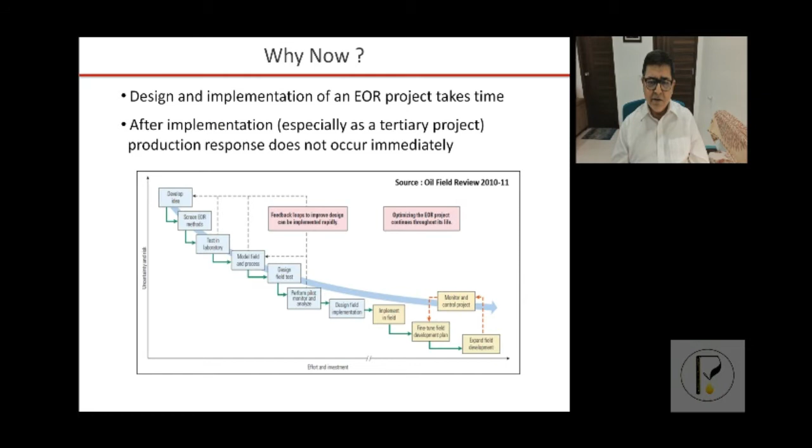Then there's a third bag of recovery processes called tertiary recovery processes, which are mostly EOR processes: thermal, gas injection, and chemical. But these days, even in the past, some of the processes have come out of the tertiary recovery bag and have been employed right in the primary stage or in the secondary stage, like steam and polymers. They are widely being used in the primary, late primary, or the beginning of the secondary recovery processes. So EOR no longer targets only immobile oil. It also targets mobile oil as well.

When to think of EOR? The time is now. Sir Winston Churchill once said, the best time to plant a tree is 20 years ago. The second best time is now. In the E&P industry, the best time to plan and begin implementation of EOR processes is during the initial development planning, when a field is discovered. And if you have not thought of it at that stage, the second best time is now.

Why now? Design and implementation of an EOR project takes time. Right from conceiving an idea, transferring it to the desktop, translating it into a one-dimensional laboratory viability project, then to a three-dimensional field pilot project, implementation, evaluation, and then drawing up plans for field-wide expansion. Its engineering design, construction, erection, commissioning takes time, 5 to 10 years.

So you can see it takes time to make the efforts and the investments to reduce the uncertainty and the risk, right from developing the idea in our mind to yielding commercial oil in the field. So that's the message. Think of EOR right at the beginning and start planning for the right EOR project, or maybe more than one EOR project. It depends on the resources available to the thinker.

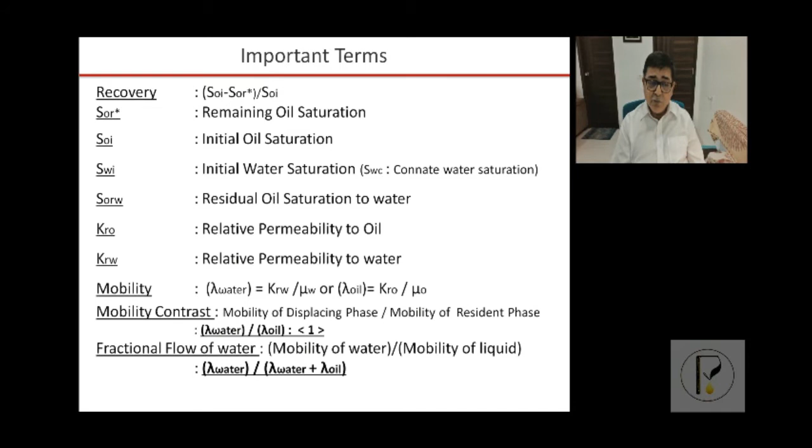So how we are concerned with these terms, we will see there. Mobility is the most important term for a reservoir engineer: the mobility of the water and the mobility of the oil. There are different types of oils, from extra heavy oil, medium gravity, light, to volatile oil, and mobilities are different for these different types of oils.

Water is more or less constant, negligibly varying with pressure and temperature. But oil properties are totally different in different types of oils, and mobilities are the major concern. Mobility is defined as the ratio of relative permeability to that phase to the viscosity of that phase. The mobility contrast, which controls the displacement in the pores, is the ratio of mobility of the displacing phase to the mobility of the resident phase. So that's mobility of water to the mobility of oil.

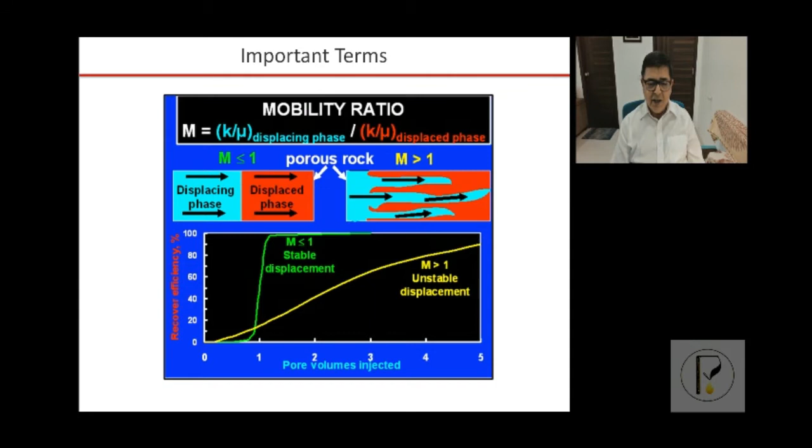Now this can be equal to 1, less than 1, or greater than 1. When it is equal to or less than 1, it is favorable displacement, a piston-like displacement, where nature cannot give a better situation than that. But as the mobility contrast goes on increasing beyond 1, the displacement becomes unstable. As a result, fingers of water start developing, which break through into the producers, leaving behind significant bypassed oil saturation and early water breakthrough, so operators produce more water and less oil with time, resulting in lower recoveries.

Now, what is fractional flow of water? Fractional flow of water is the mobility of water to the mobility of the liquid. So lambda water by lambda water plus lambda oil. In the subsequent slides, we will see more of this mobility contrast.

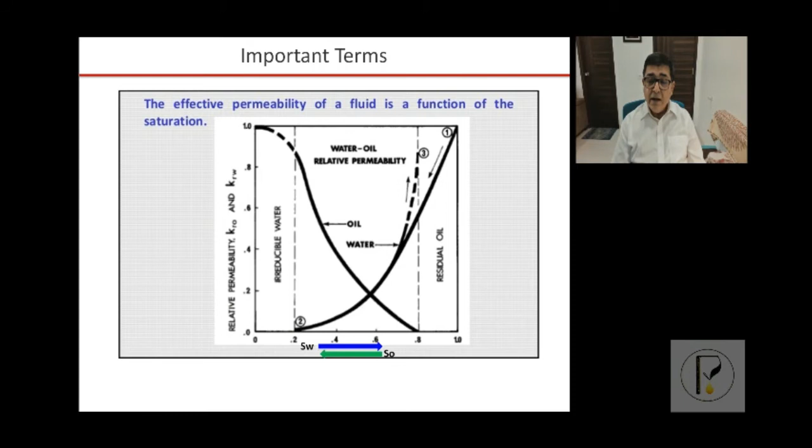This picture depicts the mobility ratio, favorable and unfavorable, stable and unstable. When it is close to 1 or less than 1, the displacement of oil by water is very stable. You can see from the curve, with 1 pore volume of water invading the pores, recovery efficiency is very high. Whereas as the mobility contrast goes on increasing more than 1, the displacement becomes very unstable. You can see the fingers in the top right hand corner of water encroaching through the reservoir and breaking through into the producers for early water production.

So you can see more pore volumes of water injected, invading the pores, and more time required to achieve the same recovery. But can we wait for such time? Can we afford to produce so much water? It costs. So EOR processes walk in at this stage to somehow make the entire process stable.

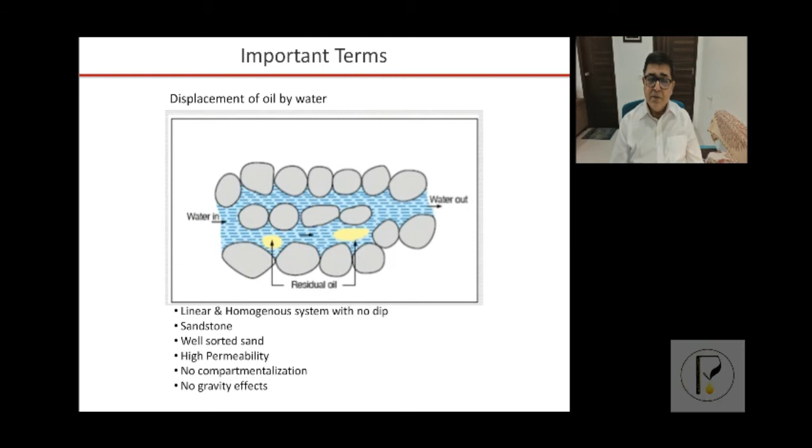Relative permeability, a very important term which we will be encountering in the fractional flow, is a dimensionless number. You can see on the y-axis relative permeability to oil and water, and the endpoints. SW is the blue, increasing saturation of water, and on the reverse is increasing oil saturation. At the endpoint KRO, we have initial water saturation of 20% and oil saturation of 80%. This is two-phase occupying the pores. At the other endpoint we have water saturation of 80% and SOR of around 20%. So these are the endpoints.

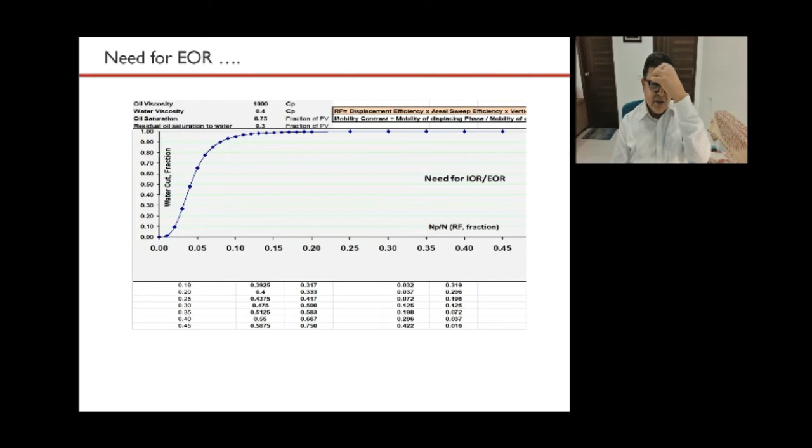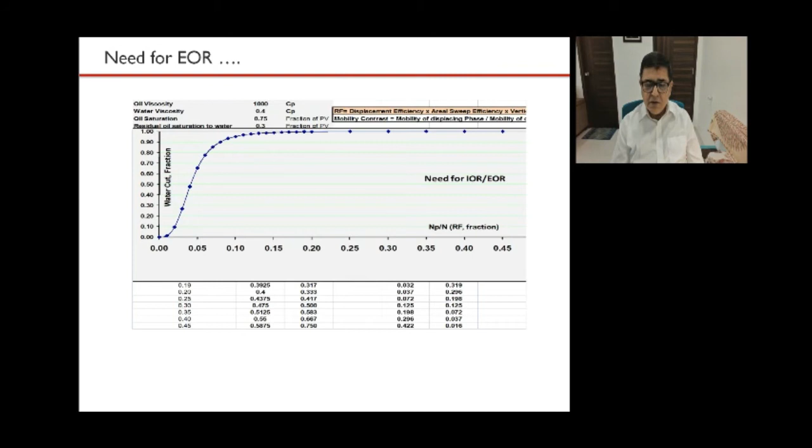You can see the intersection of KRW and KRO beyond 50%, which indicates that it's a water wet system. And you can note the endpoints, between these two numbers, SWI and SOR. This is the water saturation that goes into the computation of normalized water saturation.

So this is a linear displacement of oil by water, water in, water out in the pores, leaving behind the residual oil within the pores, which is held by the interfacial forces as well as the capillary forces. How much of water is flowing out of how much of the liquid coming out, that's the basic fractional flow.

What we are going to see in the subsequent computation of fractional flow is for a linear homogeneous system with no dip, no gravity effects, sandstone reservoirs, very well sorted sands, tortuosity 1, high permeability, and no compartmentalization. This should be the launching pad for you to start developing on a radial system and subsequently on a multi-layered system of fractional flow.

So now, before we move on to the actual fractional flow, this is the need for EOR. You can see the fractional flow curve, water cut with recovery. Well, the x-axis can be represented by water saturation as well, but for easier understanding, I have represented it with recovery for you to appreciate better. And we can see at 90% water cut, we have around 6 to 7% recovery for that particular type of oil which is being considered.

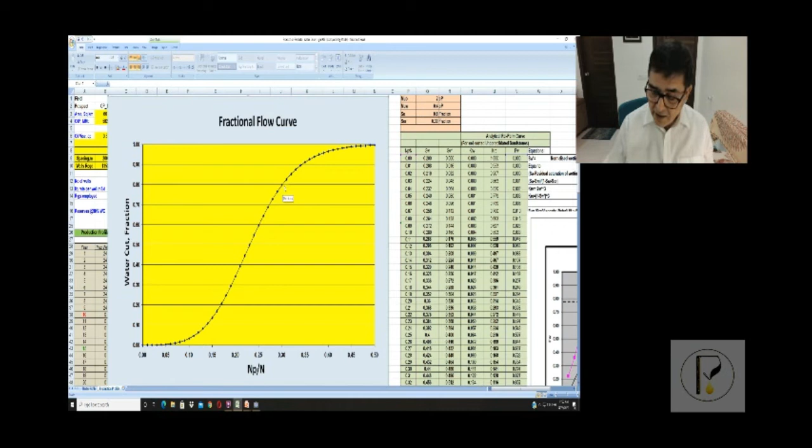So some operators like me, don't be biased like me, but sometimes I have been in some other place and straight away implemented steam injection to reduce the viscosity of oil and get a significant amount of incremental oil, shifting the fractional flow curve to the right. And that's substantial, from 7 to around 35% at 90% water cut.

Well, there can be another school of thought, and that's very prevalent these days. Let's go back to 500 centipoise. Well, in steam, two things were happening. Sorry, I forgot to tell you. Reducing the viscosity to 2 centipoise, as well as reducing the SOR number. So steam was targeting two things, not only reducing the numerator to reduce the mobility contrast, as well as targeting the SOR number.

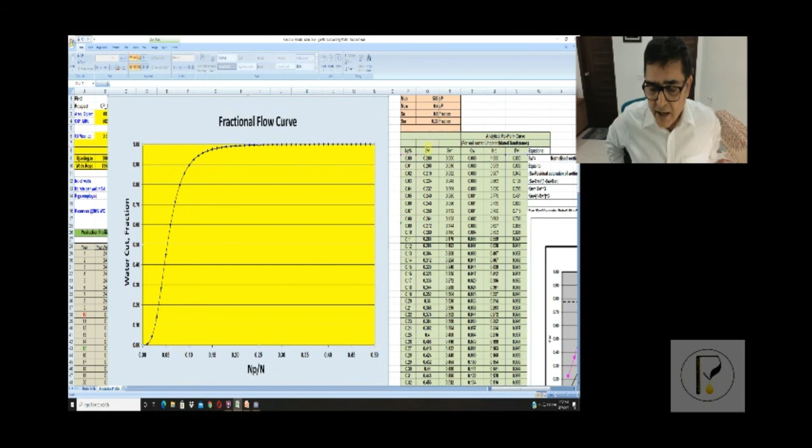But with some operators and many companies, it's becoming very popular these days to start polymer injection right from day one. It all depends on the availability of resources like capital, human knowledge, the appetite to take risk, and many other factors which go into this decision making. But I have seen some operators even attempt both in parallel to see the efficacy of both processes.

So if the reservoir temperature is very favorable, very low, that means cold reservoirs, as well as salinity is very low, like fresh water, then polymers, like some countries in South America have done, and they're getting very successful results. Straight away from day one or day two, right at the end of primary, attempting polymer flood and getting a substantial amount of oil.

Polymer is relatively easier to operate than steam, but both have their merits and demerits. Both have their advantages and disadvantages. But both yield incremental revenues. So this is 500. And let's go back now to the original condition of water and 500.

Now, if it is extra heavy oil or extremely viscous oil, well, you have a very quick water breakthrough, at around 90%, less than 5% recovery. What to do? Why wait for a water flood? Well, go and inject steam or polymer. See, many reservoirs all over the world of this type are very popular with steam injection, wherein viscosity goes down to a very low number and reduces the SOR to 15%, even lower, 10% or so. But for demonstration purposes, I'm showing just 15%.

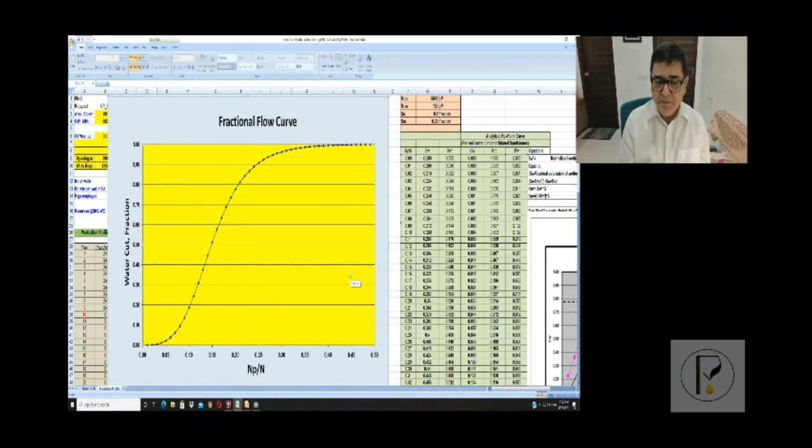So let's go back to the original condition. And in Canada, this type of reservoirs are being operated by injecting polymers and getting a substantial amount of oil. So again, it depends which one to go for. It depends on you. It depends on the expertise of that company, the ease of operating, the appetite to take the risk, how much resources can be made available. It all depends on that.

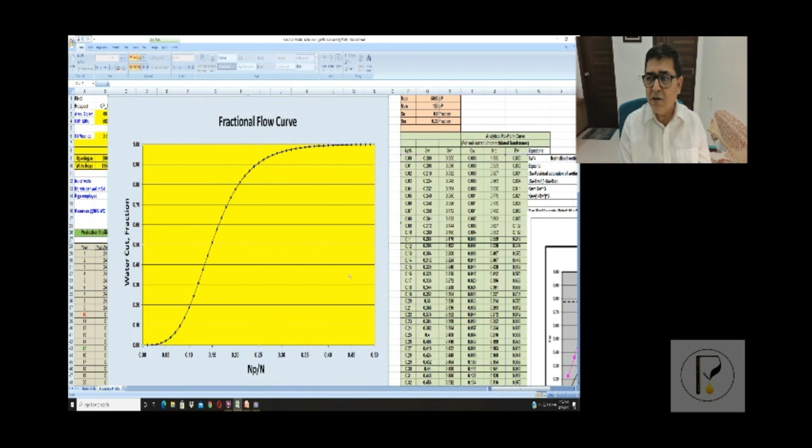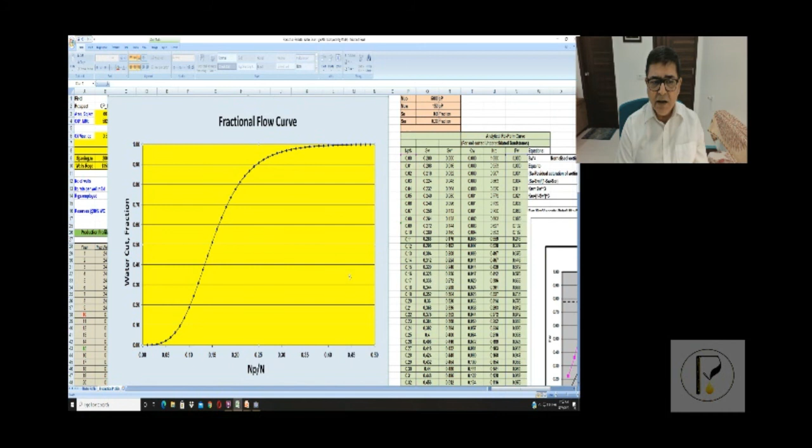It's not hard and fast, but the same operator can do both things together at the same time. So you get a fair idea now as to what this fractional flow can do. This gives a fair idea as to the wide extent, from a light volatile oil to an extremely heavy oil.

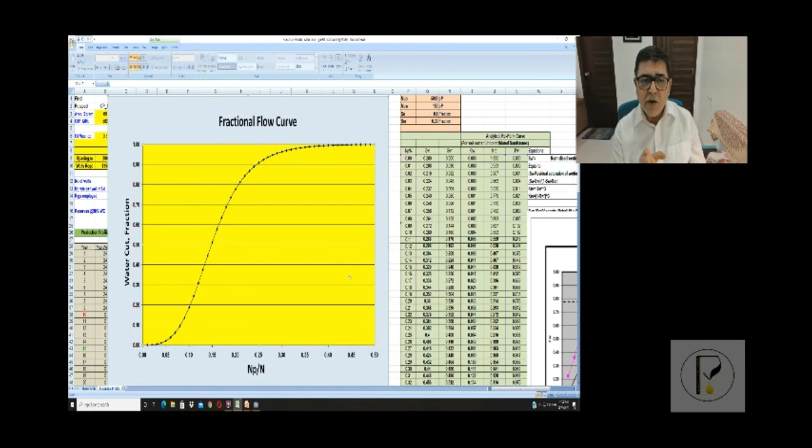The mobility contrast is the most important term that a reservoir engineer has to understand right at the word go. That should be in the mind, and that should bring to mind the fractional flow curve immediately. And having that fractional flow curve, you obviously know what sort of EOR will work in such reservoirs. So this is what it is.

Now I'd like to show you in a nutshell what these EOR processes actually are responsible for. So there we are. In fact, this is what I want to show you. The water flood is the baseline. Everything needs to be compared with water flood. The engineered water flood, we call it the smart water flood or the low sal water flood, which are very specific in nature. Sometimes in very high salinity reservoirs they are one of the good options, but the incremental recovery is low.

Immiscible gas flood, well, if you have resources available to you, EOR agents like carbon dioxide in natural deposits, you can go for that. Like in some countries in Europe with significant CO2 natural deposits, they have gone for immiscible CO2 gas flood. But the recovery factor is moderate. Hydrocarbon immiscible floods, I myself have seen, are inefficient ones, very low incremental, maybe plus minus 1 to 2%, not beyond that. CO2 is moderate, more than that, but not like the miscible one.

Miscibles are the most efficient and high yielding EOR processes, whether it's hydrocarbon WAG or carbon dioxide WAG. They are extremely efficient EOR processes. And once the reservoir pressure is above the miscibility pressure, certainly miscible gas flood is the key to your additional oil.

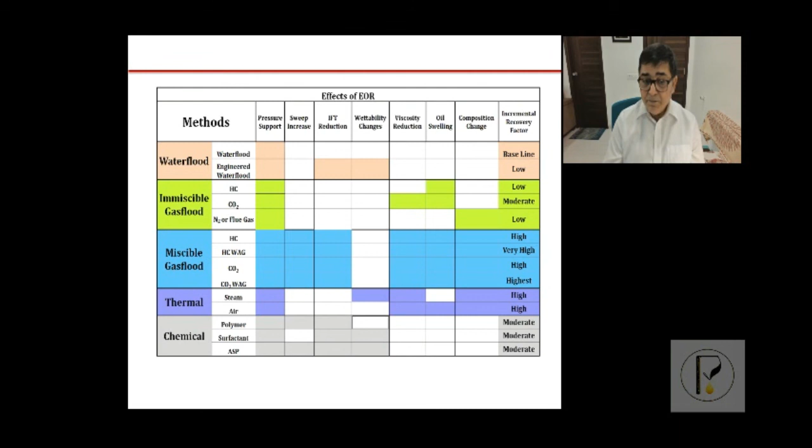Chemicals, yes, it's coming up very fast. What it was 30 years back, today it's totally different. The cost has gone down significantly, and polymer not only modifies the flood front, not only makes unfavorable displacement into favorable displacement by increasing the denominator of the mobility contrast, it even can reduce residual oil saturation.

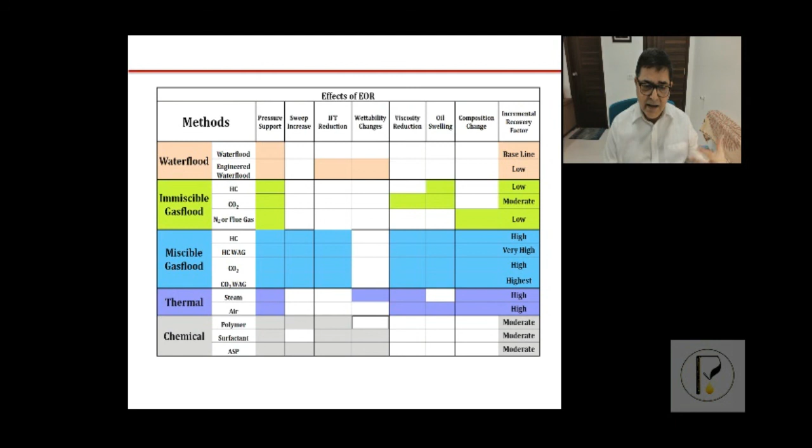These are some particular types of polymers, but most commonly it is used as a precursor to alkali surfactant polymer fluids, to modify the existing water flood, cut down on those fingers, make the flood front more or less stable, piston-like, and get some easy oil to be produced. So this is what I wanted to show you, how EOR is linked to the fractional flow and, in a nutshell, what these EOR processes are responsible for affecting.